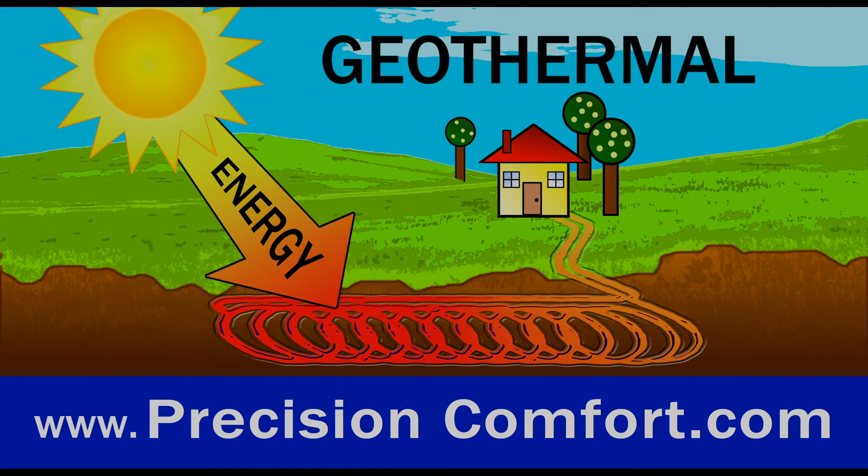This video will explain geothermal heating and cooling, the most energy efficient home comfort system available. This is part one of two videos, and we'll see how geothermal works and explain the geothermal earth loop.

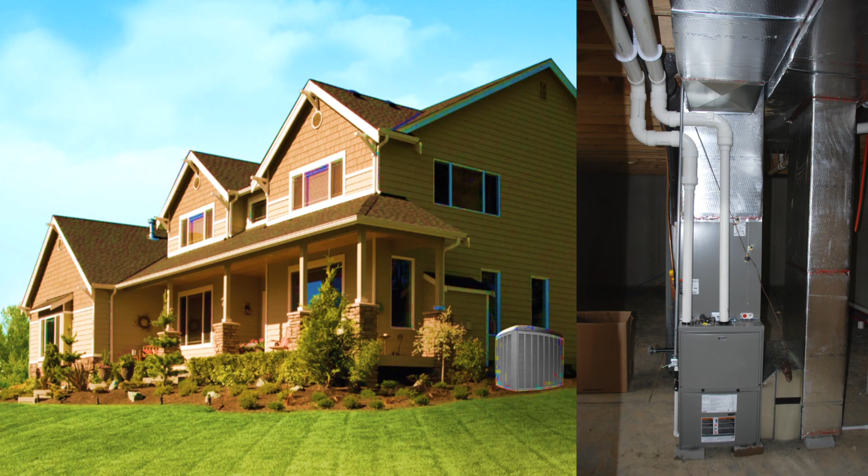Let's start with summer air conditioning. When it's hot out, your home needs a machine to deliver cool air. But this machine must dispose of the heat somewhere in order to provide continuous cooling. Your indoor fan and duct system gathers the heat in your home and transports tens of thousands of BTUs of heat to the outside. Now here's the part you're most familiar with.

When you walk past your outdoor air conditioner on a hot summer day, it's blowing hot air. This is the heat that's been sucked from your home, and the air conditioner is trying to expel this heat outside. But it's not easy when the air is already over 90 degrees.

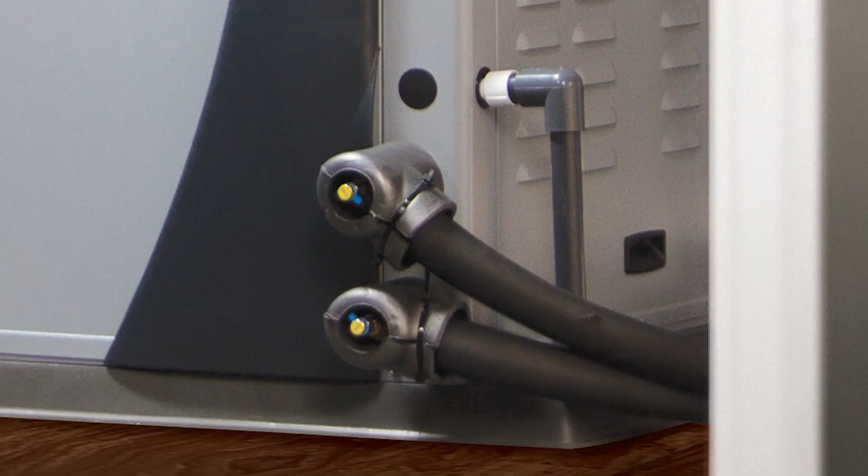Now imagine we eliminate your outdoor air conditioners. In your yard is a very convenient source of cooling. It's the cool ground. Here we can install geothermal loop piping. The geothermal ground loop is connected to the inside geothermal system where your furnace is currently located.

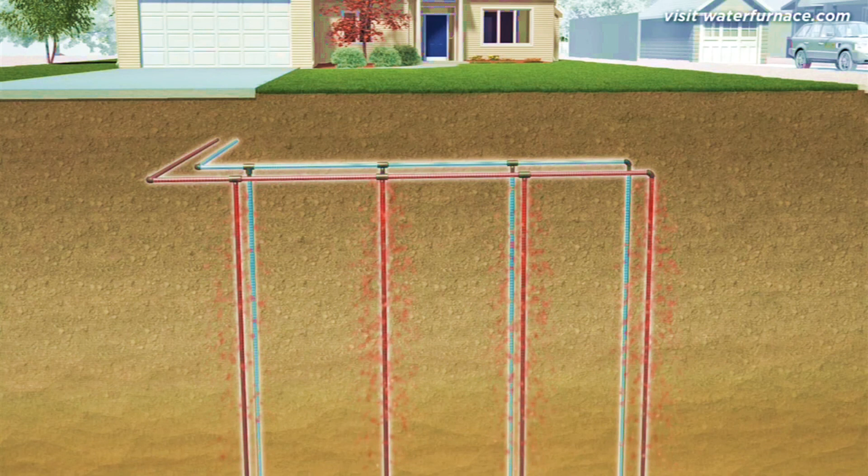A geothermal heat pump can dissipate heat into the cool ground at a much better efficiency than a conventional air conditioner working in hot air. This saves a lot of money over a hot summer season. So here's your current setup on your patio with your family. With geothermal as an added bonus, your patio changes from a noisy machine shop back to the peaceful outdoors that only a geothermal system allows.

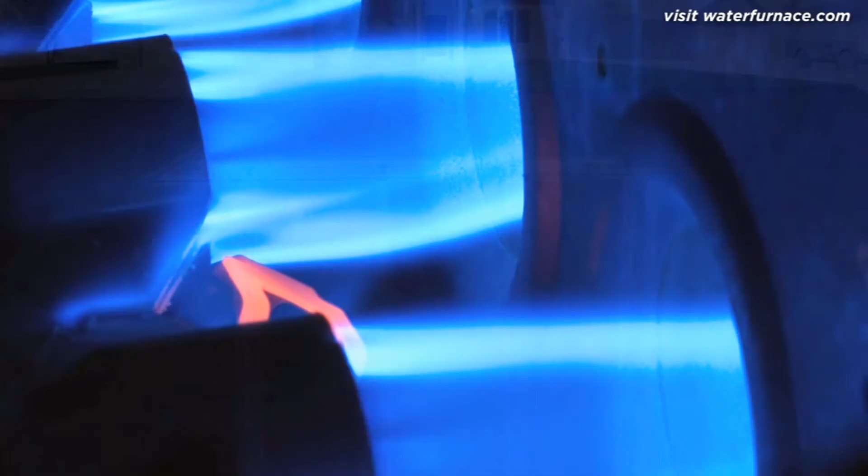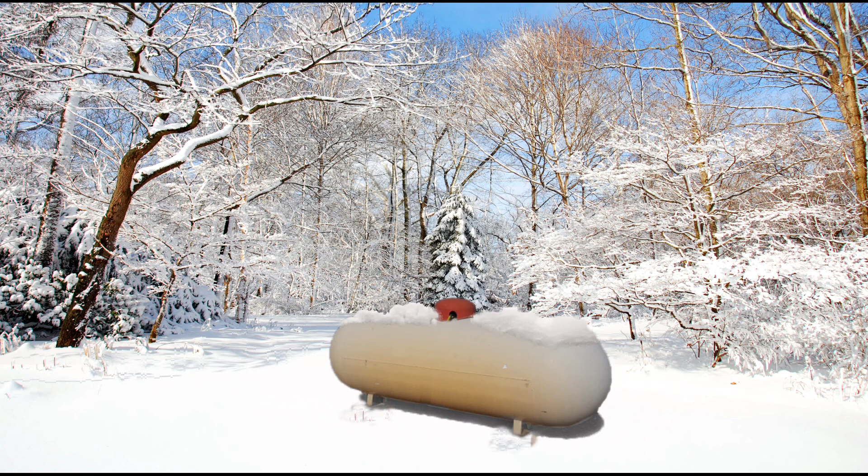In the winter, a geothermal heat pump has no flame and no combustion byproducts. And it will even improve the looks of your backyard. Here's a common source of heat in the winter. But there's a much cleaner, environmentally friendly, and much less expensive source of heat. It's the heat stored in your own backyard. The geothermal loop is able to harvest this heat from the ground and move it to your home.

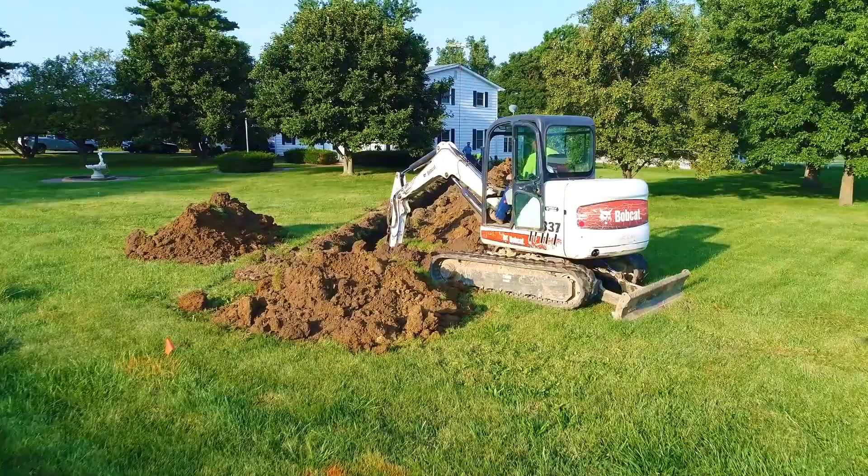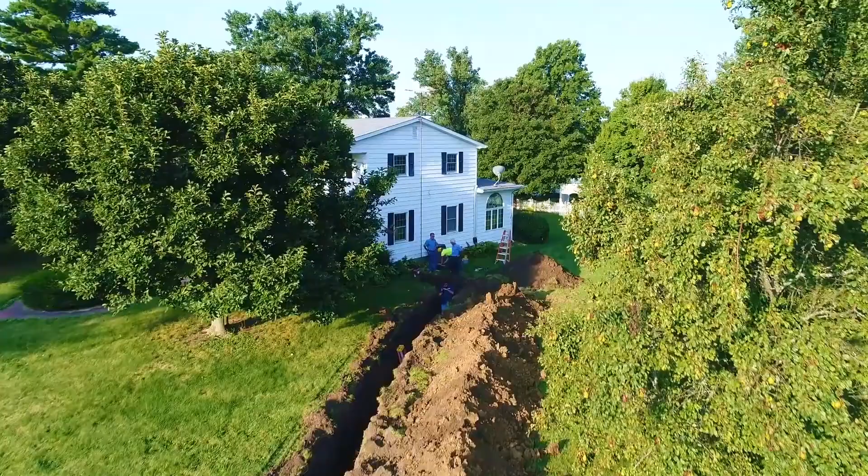Geothermal loops come in a variety of shapes and designs. If you have about a half an acre of open ground, your lowest cost loop is the horizontal trench loop installed by Precision Comfort Systems. The length of the trench and pipes depends on the size of your home. Multiple loop pipes are arranged in the trench and then backfilled. The trench route is noticeable until all the soil settles back to normal.

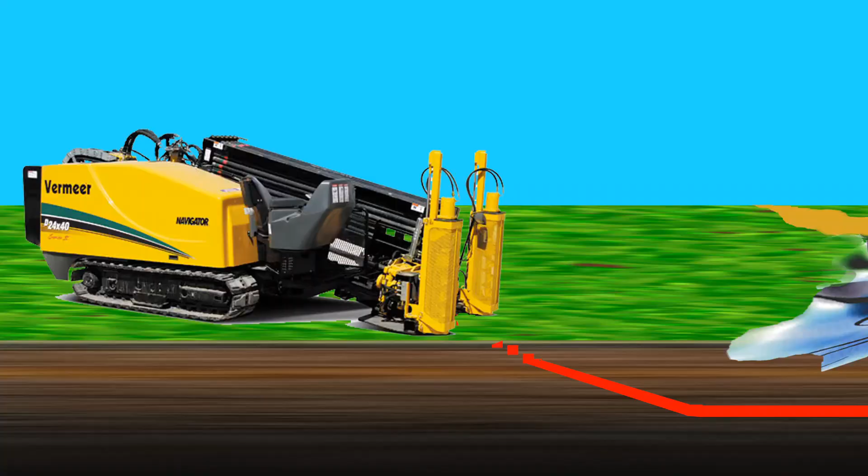If you have the room, but obstacles prevent digging an open trench, we can always bore a loop path into the ground. Sometimes referred to as directional drilling, this loop can go well below or around most anything and has much less ground disturbance. This is a good choice for wooded properties.

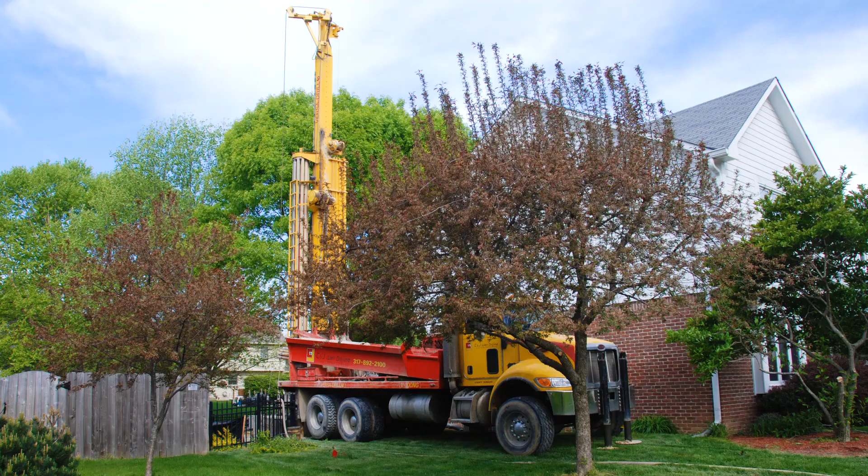Even if you do not have the open ground, we can still install a geothermal loop in a tight spot by drilling a vertical loop. We need access to the drilling location for standard well drilling equipment. A short trench is then used to connect the vertical loop to the home.

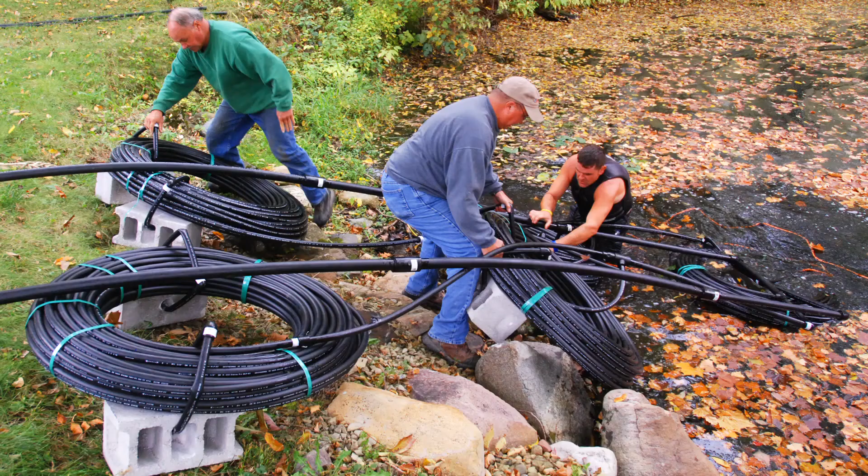Sometimes a home has a lake that can be utilized for the geothermal loop. Loop pipe coils are sunk to the bottom of the lake. The lake needs to be large enough, deep enough, and close to the home to utilize this loop design.

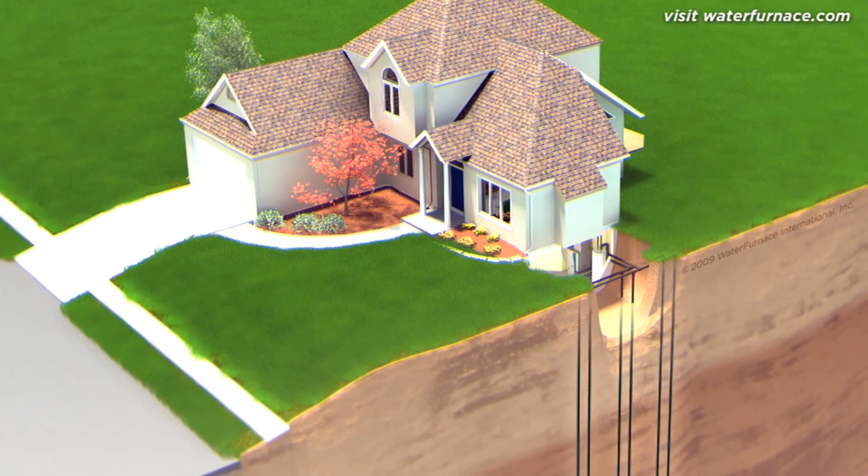These 4 loops are called closed loop systems, where we circulate antifreeze liquid from the indoor components through the loop in the yard and returning to the home with added heating or cooling. Having geothermal is like having your own private energy source to heat and cool your home.

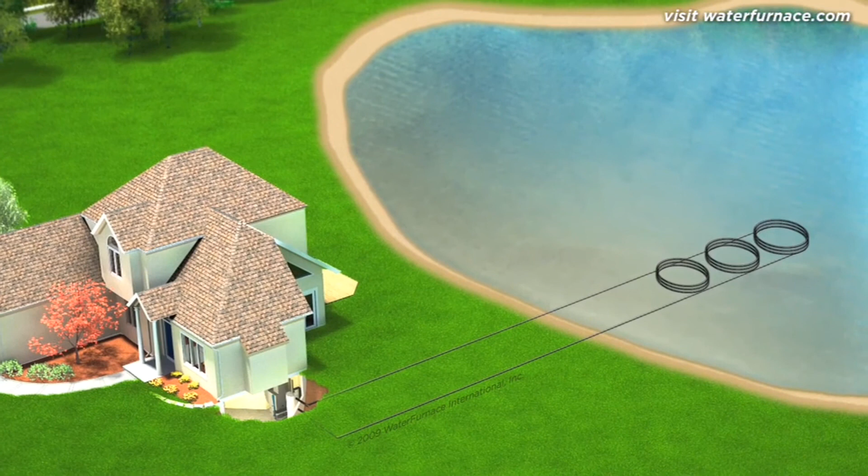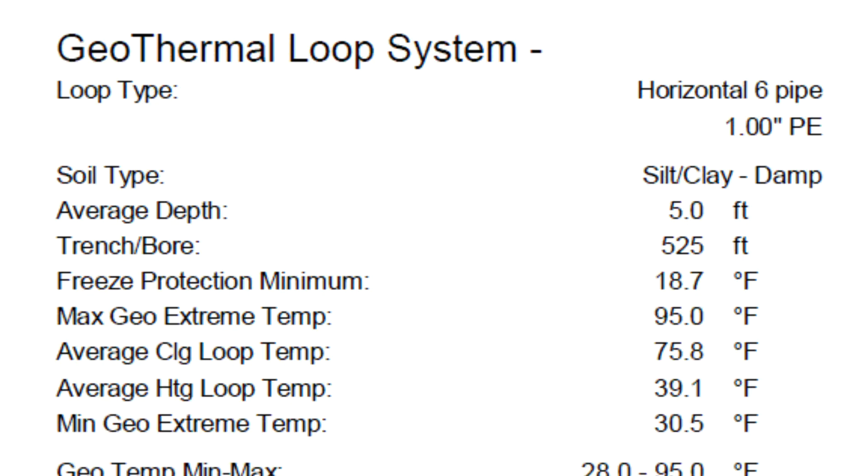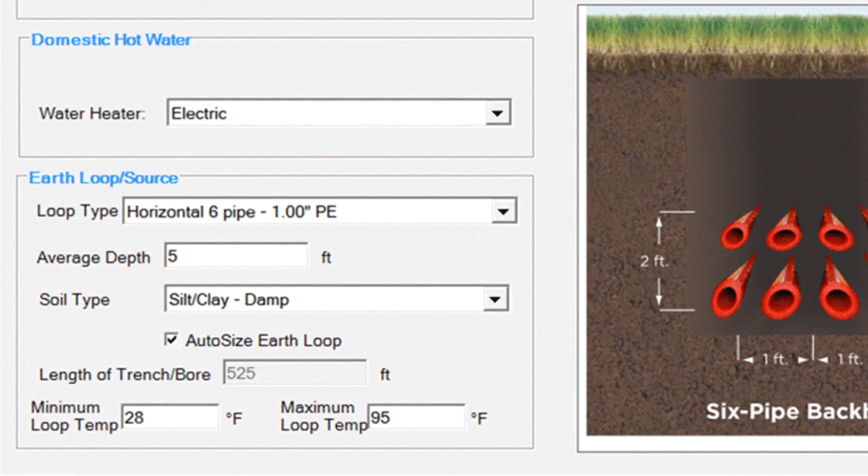These 4 closed loop designs, although different lengths and depths, will all perform the same. Precision Comfort Systems evaluates the heating and cooling load from your home, the soil type, depth of the loop, and even soil moisture. Then we run our loop design software to ensure a cost-effective design with proper loop length.

Most geothermal systems are closed loops, but sometimes we consider an open loop. An open loop simply uses water from a well and then discharges the water in an adequate lake or river. Several conditions must be met before considering an open loop.

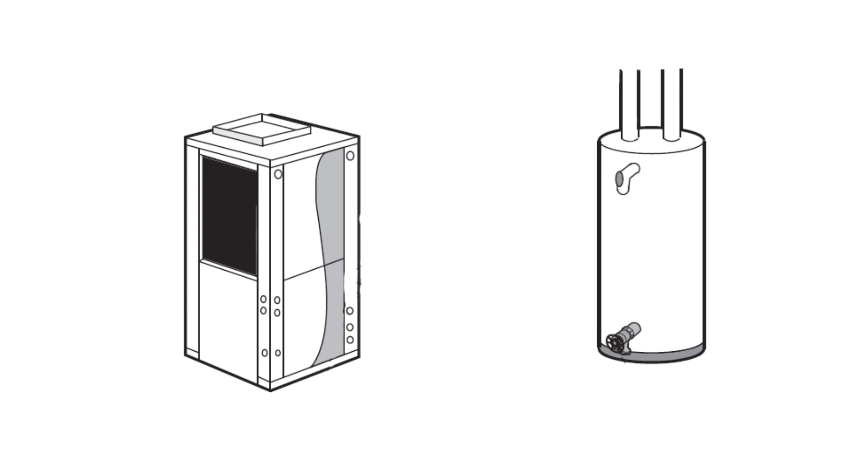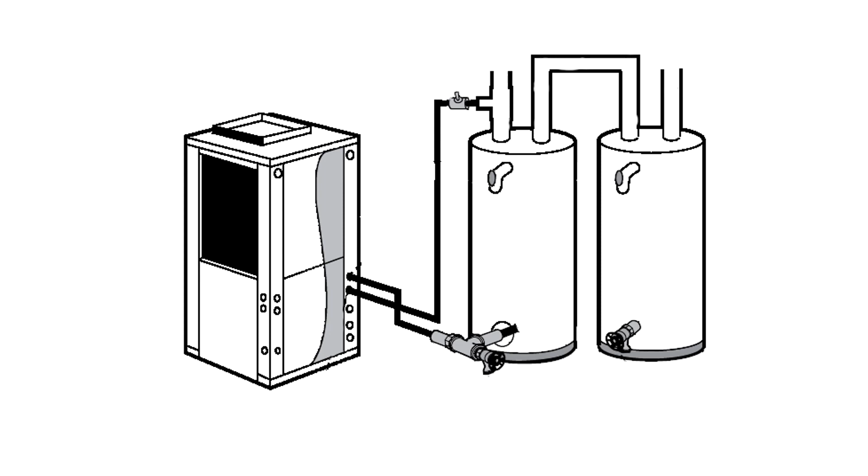Not only does a geothermal system save you money on your home heating and air conditioning, but it can also save you money on water heating. If your geothermal system is near your water heater, order your geo unit with a de-superheater and advanced controls installed. Then add a preheat water tank. Imagine the savings when your summer air conditioning provides free heat to your water heater.

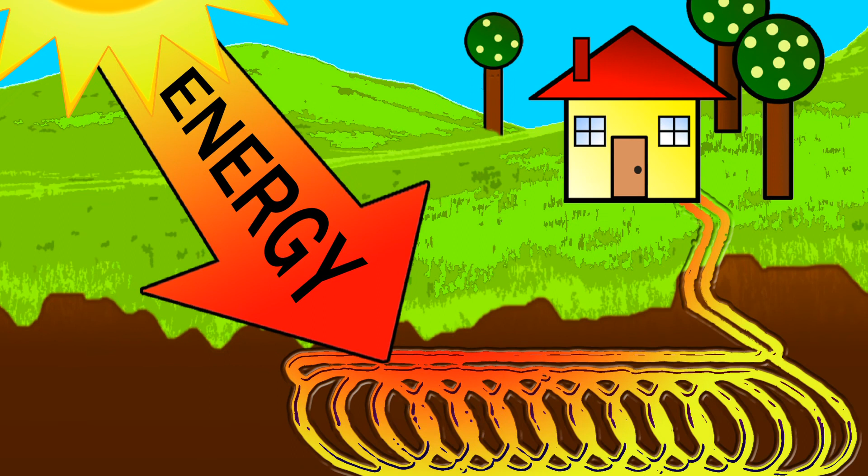One last thing about your geothermal system. The initial design, the installation, and future maintenance for your system should be done by an experienced geothermal contractor like Precision Comfort Systems.